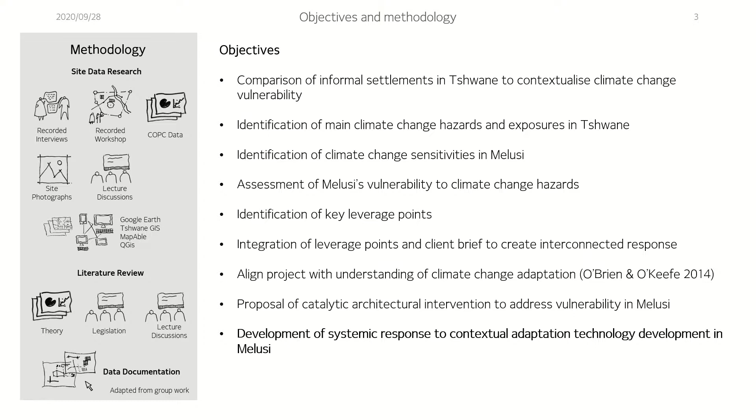the formal and informal sectors. The proposal seeks to address climate change adaptation through the development of appropriate construction technologies. The approach is aligned with O'Brien and O'Keefe's definition of climate change adaptation as the adjustment of the built environment to be more resilient to current and projected climate change exposures. Emphasis is placed on using a participatory approach in order to assure community agency and ownership.

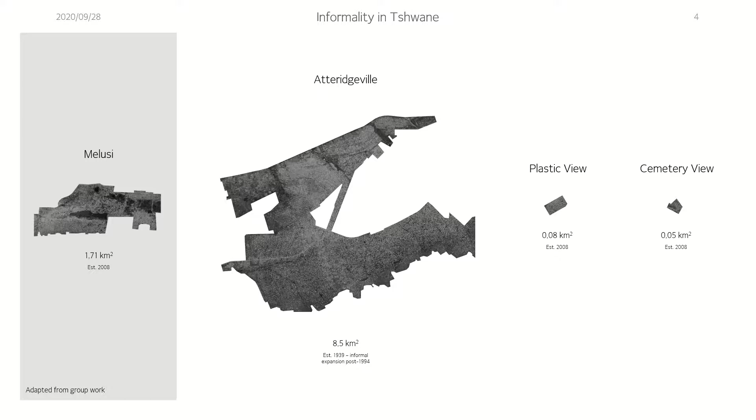Informal settlement is becoming prevalent in Tshwane as marginalized groups seek urban inclusion. These settlements take on different forms and scales, but share similar vulnerabilities to climate change. Rapid growth can be observed in Tshwane's informal settlements since 2008. This trend increased exponentially from 2015, highlighting the importance of climate change adaptation to reduce the current and future vulnerability of this rapidly emerging urban group.

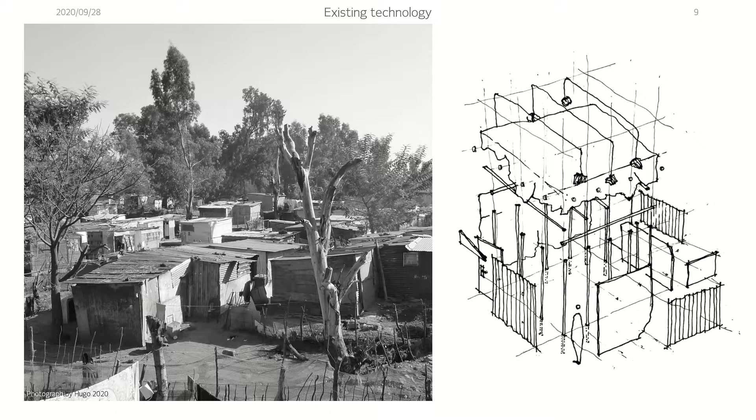For the purposes of this project, the focus will be on Melusi, an informal settlement to the northwest of Pretoria's CBD. Melusi is a developing neighborhood established in 2008. While there are signs of formalization and formal construction techniques in the settlement, the available information seems to indicate that many dwellings utilize the same informal techniques present in similar settlements. This takes the form of timber frame structures clad with recycled panels of timber or metal. These techniques are important to consider when proposing future developments in Melusi.

With a basic understanding of the context, vulnerability mapping was conducted to better understand the current and future conditions in Melusi, which could result in climate change vulnerability. Climate change impacts can be seen as a result of exposure to climate change hazards and an entity's sensitivity to that exposure. The adaptive capacity of the entity determines its overall vulnerability to these impacts.

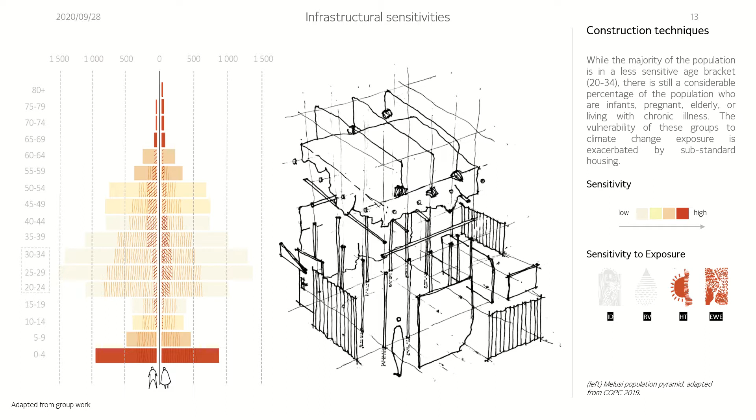Three main climate change hazards were identified in Melusi, namely rainfall variability, increased temperatures and heatwave days, and increased frequency and severity of extreme weather events. Exposure to these hazards is significantly increased by the existing infrastructural and socio-economic deficits present in Melusi. For example, Melusi's prevalent construction technologies increase the exposure of vulnerable population groups to hazards such as increased temperatures and

extreme weather events. Furthermore, residents' limited access to healthcare services and information exacerbates this existing sensitivity and reduces the settlement's adaptive capacity. At a human scale, these sensitivities may have several negative effects. For example, a pregnant person may experience health issues from exposure to high temperatures. This hazard may also reduce the effectiveness of the current health post, leading to further negative impacts for the residents.

Following the vulnerability investigation, the identified sensitivities in Melusi were mapped, allowing the projection of possible impacts resulting from the exposure to climate change hazards. Additionally, adaptive sensitivities or leverage points were identified. These issues could be addressed to reduce climate change impacts within Melusi and thus reduce its overall vulnerability. Based on the vulnerability mapping, education, access to information, access to healthcare services, social support, and construction technology were identified as important leverage points to address.

This helped form the foundation of the conceptual premise. Using the identified leverage points and the requirements of the COPC brief, a list of programs was generated to guide the intervention. A spiritual space, community center, research center and clinic, market space, temporary housing, and workshop will be used to address both the client brief and leverage points. The projected users of each space were also mapped to help inform the eventual design.

The site of the intervention is in the southeast of Melusi between two phases of the settlement. This is the location of the existing COPC health post as well as educational and youth facilities. Due to the relatively small scale of the intervention, it was important to consider the different levels at which it operates. This includes its spatial response to the immediate context, systemic response to Melusi as a whole, and the potential lessons to be applied within other informal settlements in the Greater Tshwane area.

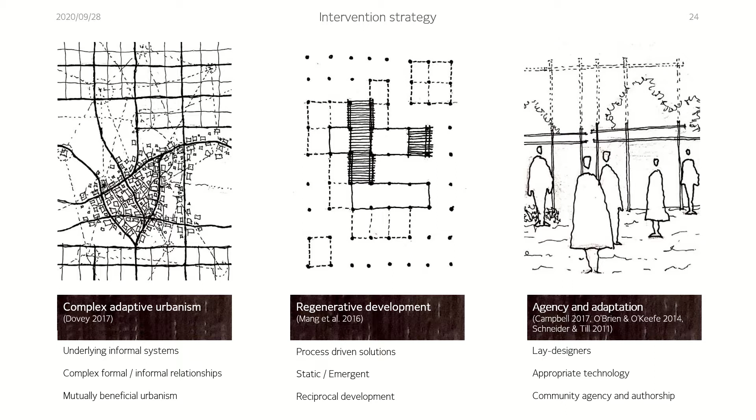The spatial articulation of the intervention should therefore consider layering of formal and informal processes, incremental reciprocal development, and the use of available skills and technologies.

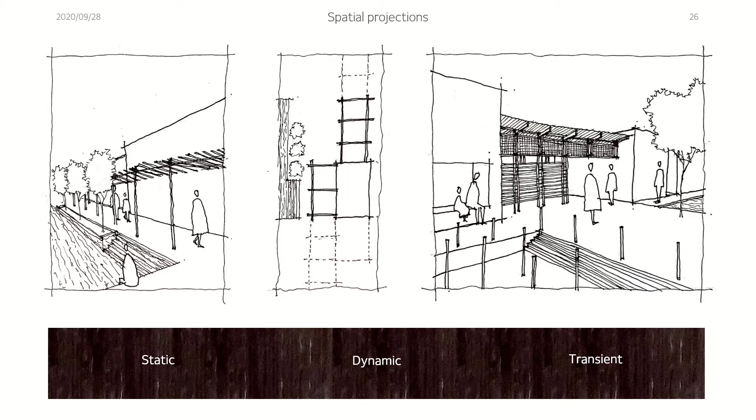Based on these strategies, preliminary spatial principles were projected. These deal with the layering of space and technologies, considering static, dynamic, and transient relationships to ensure flexibility and accommodation of informal technologies and processes.

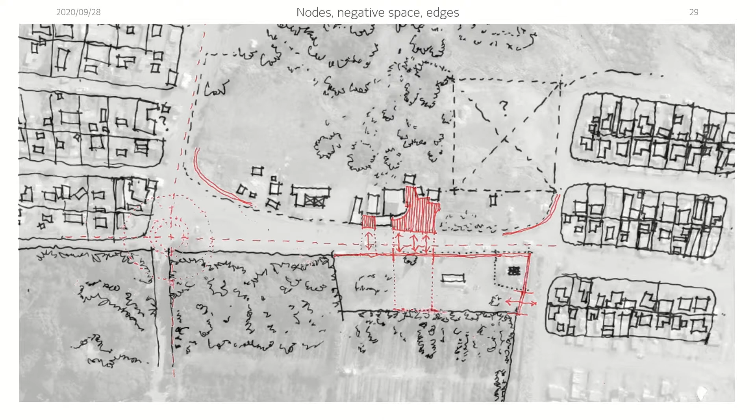These explorations allowed the generation of a preliminary design response. This began with a site analysis which considered physical features and boundaries, nodes, negative spaces and important edges, social and

systemic exchanges, and programmatic and systemic links. This was used to generate an initial mass exploration on the site of the existing health post, responding to a

contextual grid and other particularities of the context. This was then refined into a preliminary massing sketch. The massing was further developed using a layering approach.

First, programmatic relationships were explored spatially. This allowed an indication of the spatial qualities required to house each combination of programs, which could be used to determine suitable construction materials and methodologies for each space.

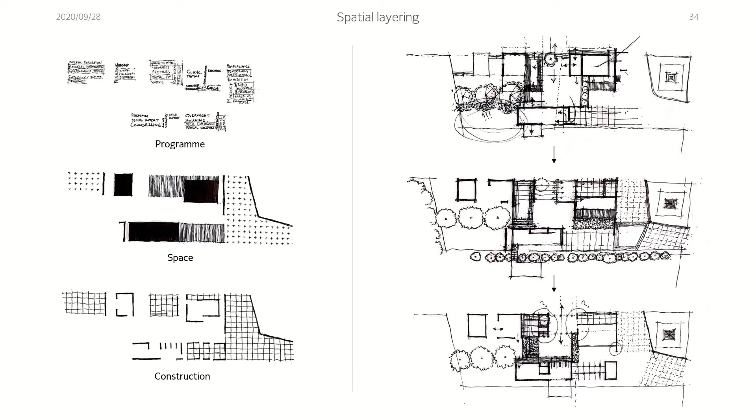Spaces were then coded as static, dynamic, or transient in order to determine their overall spatial and technological articulation. Several iterations of massing were explored and refined into a sketch plan, which indicated the main programs as well as the static, dynamic, and transient coding of the intervention.

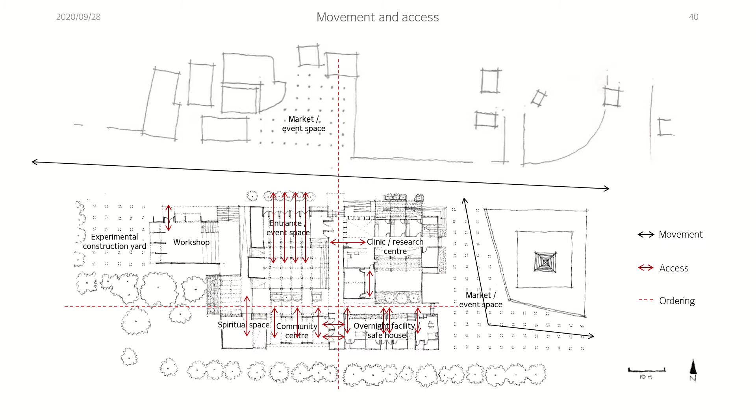The northern edge was identified as the main public interface, which initiated an exploration of public, semi-public, and private spaces to inform site ordering and access, and ultimately leading to the development of the intervention's urban edge.

At this stage, the articulation of the systemic response became pertinent. This is layered according to the static, dynamic, and transient coding which informed the design thus far.

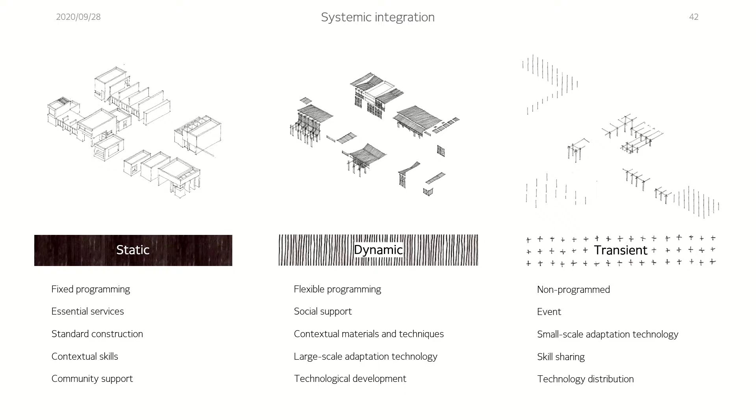Static spaces provide fixed programming, including the health post and research center. These spaces use standard masonry construction techniques and provide the permanent anchor points of the intervention. The static layer addresses leverage points and climate change adaptation through the provision of essential health and well-being services, education,

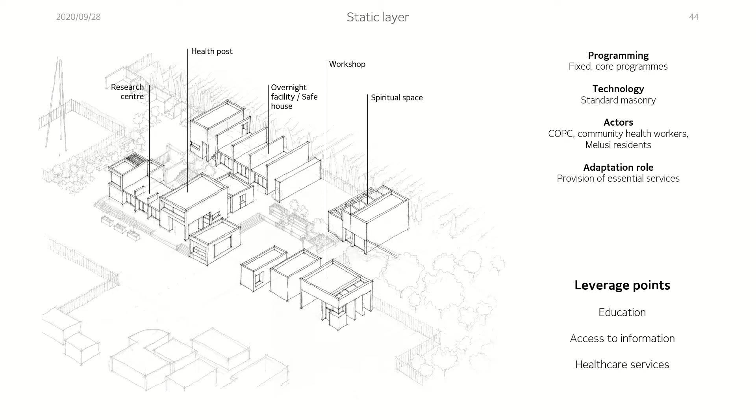and access to information. Dynamic spaces house flexible programs such as gathering and event spaces, providing social and spatial services to the public. These are articulated by additive or infill structures which use contextual materials, knowledge, and techniques from local experts in collaboration with external expertise.

This reciprocal relationship between formal and informal actors is intended to develop new construction technologies which reduce exposure by using existing materials and expertise in new ways.

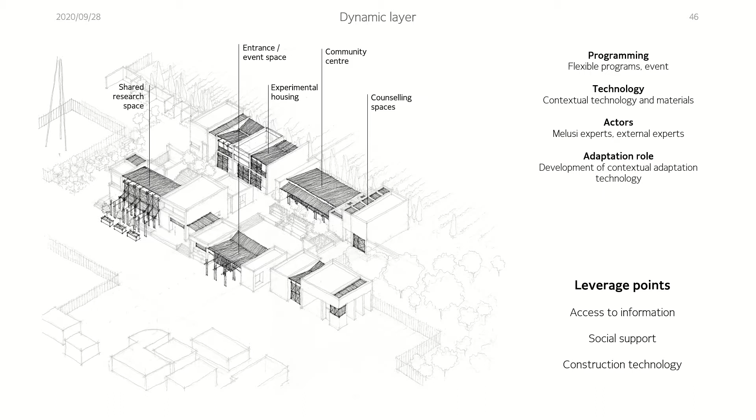Overall, the dynamic layer addresses adaptation by providing social services and, more importantly, the development of more resilient construction technologies to address infrastructural deficits. Finally, transient spaces are non-programmed, allowing the generation of emergent programs to suit the community's needs.

The intention is for these spaces to serve as community-driven testing grounds for skill sharing and the refinement of adaptation technologies developed through the construction of the intervention.

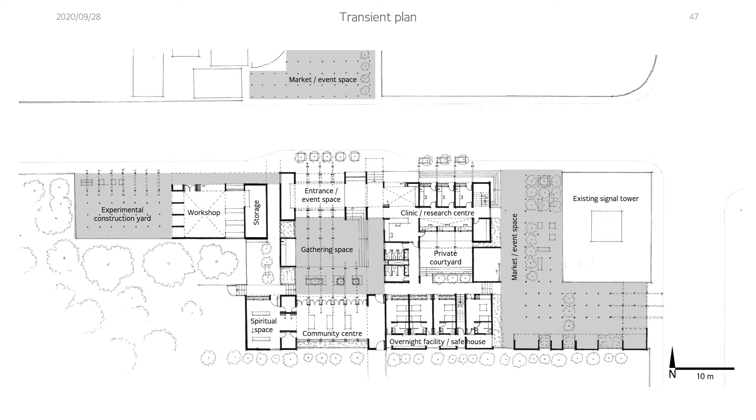This would function in conjunction with a workshop where large-scale contextual adaptation technologies are further refined on a smaller scale. Modular elements such as solar screens or insulated roof overlays could be tested in temporary installations such as markets before being made available to individual households.

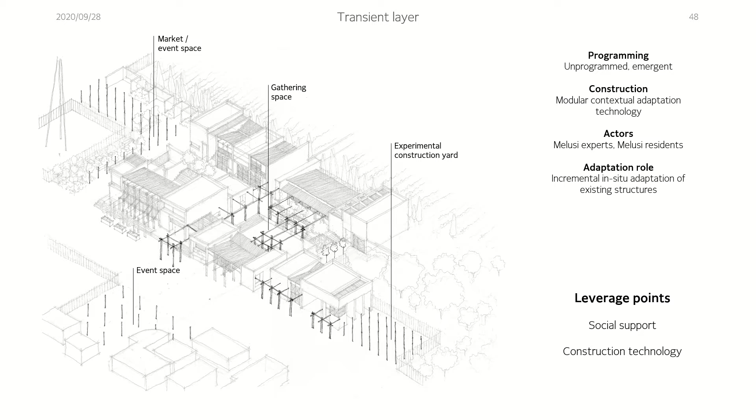Ultimately, this layer addresses adaptation through further technological development and the incremental in-situ upgrade of existing structures to reduce exposure to climate change hazards. In addition to their adaptation roles, the systemic layers interact spatially and programmatically.

These links strengthen individual programs and allow flexibility in use where necessary. Technological interactions between layers are also important to consider and have structural and spatial implications.

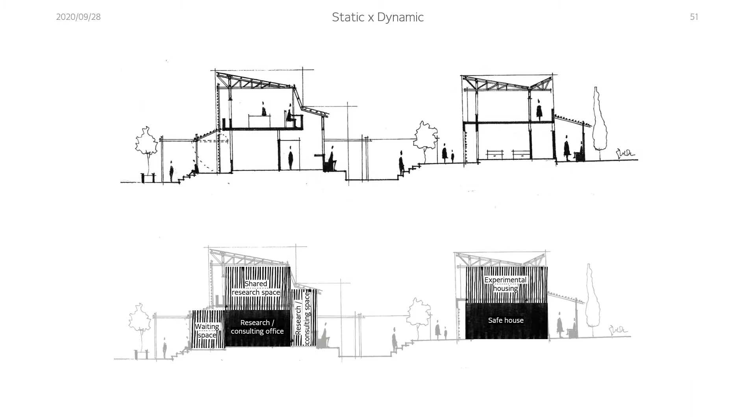This is briefly highlighted by site sections through a combined static and dynamic space, related dynamic and transient spaces, and two static spaces. The intention is for the intervention to develop incrementally, beginning with a static shell, moving to the

infill of static programs, and further development of dynamic spaces and contextual adaptation technologies to articulate additional functions. The ultimate goal is the development of a complex reciprocal intervention which recognizes the needs and values of both formal and informal urban processes to facilitate future community-driven development and climate change adaptation.

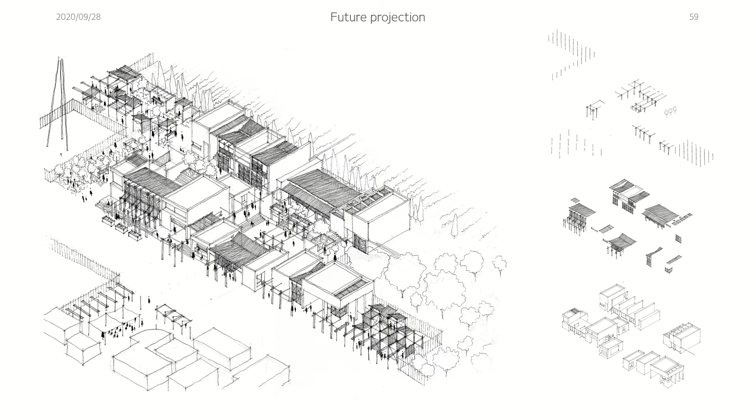To conclude, the intervention seeks to reduce climate change vulnerability in Melusi at several levels. The programmatic provision of essential health and social services addresses the leverage points of education, access to information, and access to healthcare.

In addition, the incremental and reciprocal development of the intervention acts as a site of research and development. This allows the generation of appropriate contextual technologies and techniques to reduce exposure to climate change hazards. These responses will be further developed on a modular scale, allowing individual in-situ upgrading driven by Melusi's residents.

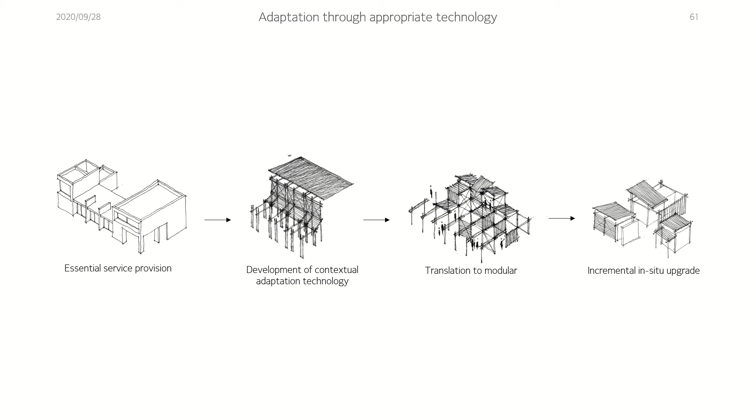Ultimately, it is hoped that this model could result in the development of appropriate technological solutions to climate change vulnerability, with the potential to be replicated in other informal settlements in Tshwane.